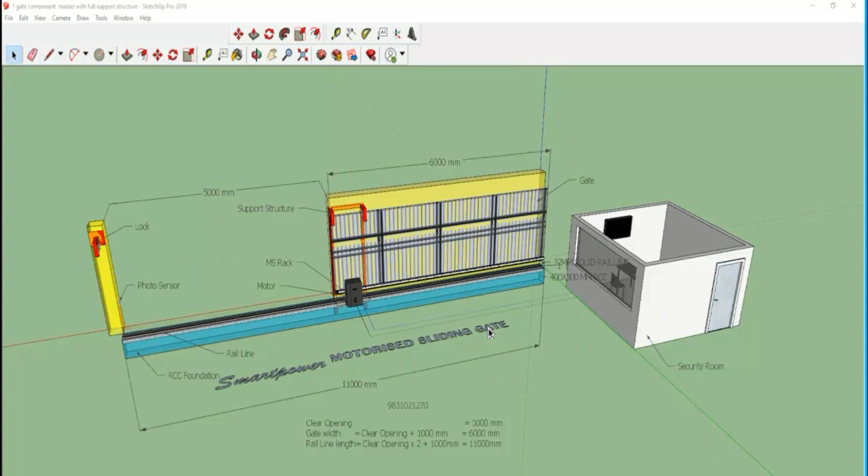This is the demonstration of Smartpower motorized sliding gate. You can see the clear opening is 5 meter, but the gate width is 6 meter. So gate size should be 1 meter more than the clear opening.

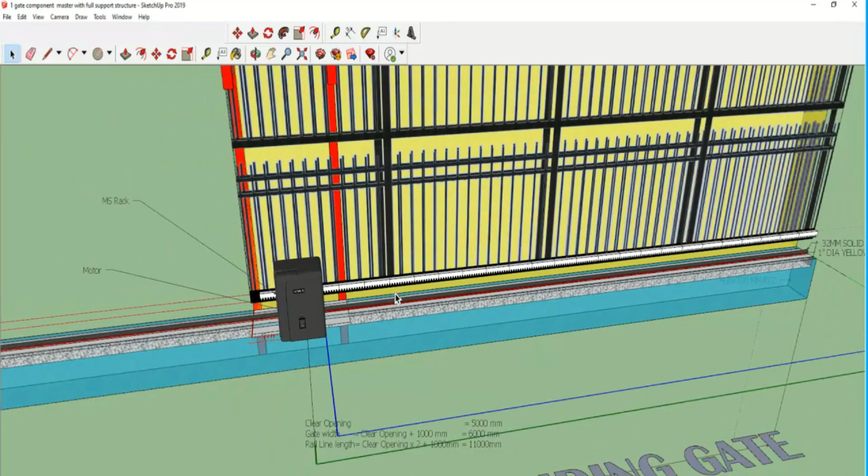I will show you the part by part also. This is the motor. This is the MS rack. This is the rack and pinion arrangement. When the motor pinion revolves, the gate rack will move and the gate will be moving.

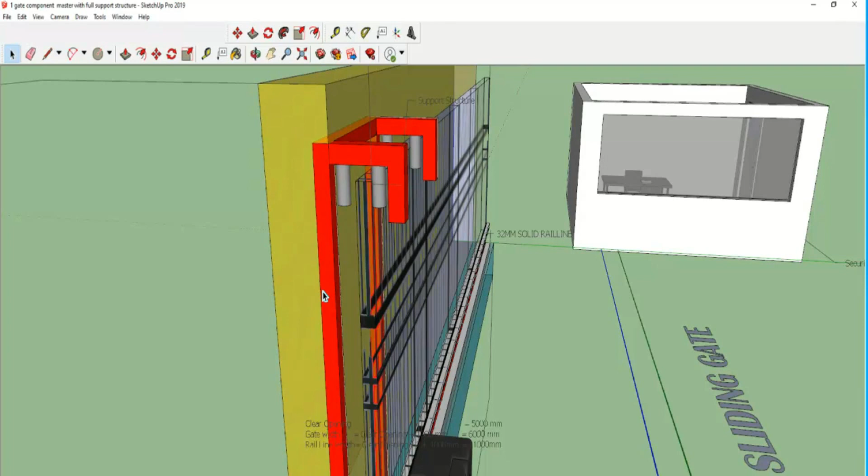This red color is the support structure. You can see the support structure is embedded inside the wall. If it is a brick wall, it can be embedded inside. If it is an RCC wall, then you can keep it inside or you can keep it outside also.

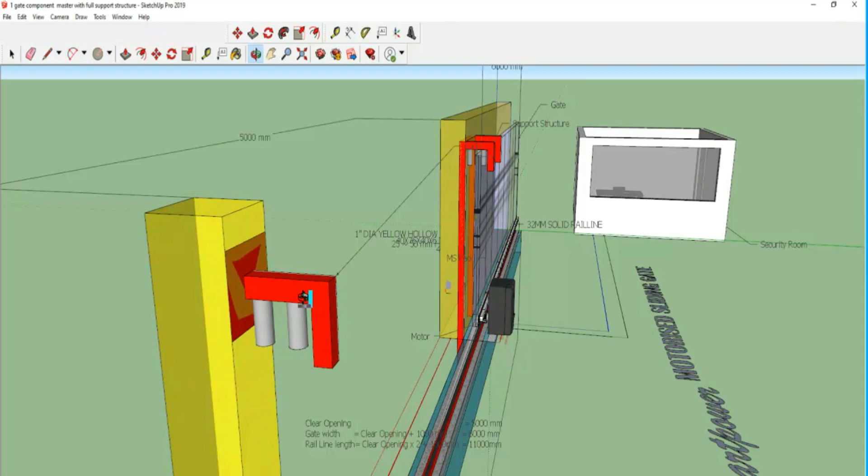And these are the rollers, support rollers. On the other side you can see this is the locking arrangement with the support wheels.

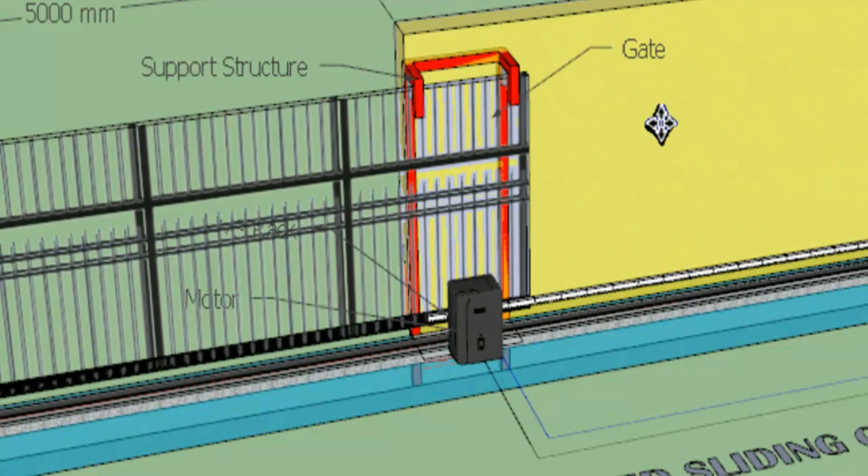I will show you the gate movement and each and every part separately. You can see this is the 5 meter gate, 6 meter gate. This can travel 5 meter and can come back.

This one is the motor. For a clear understanding, we can remove the motor and show you. This is the motor and this is the MS rack.

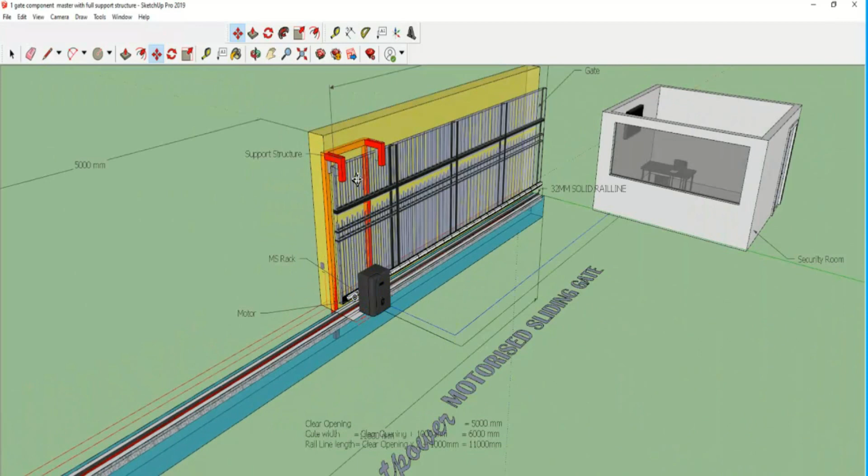This red one is the support structure. If you see from the back side, this support structure is embedded inside the ground, 2 to 3 feet inside the ground in the RCC foundation.

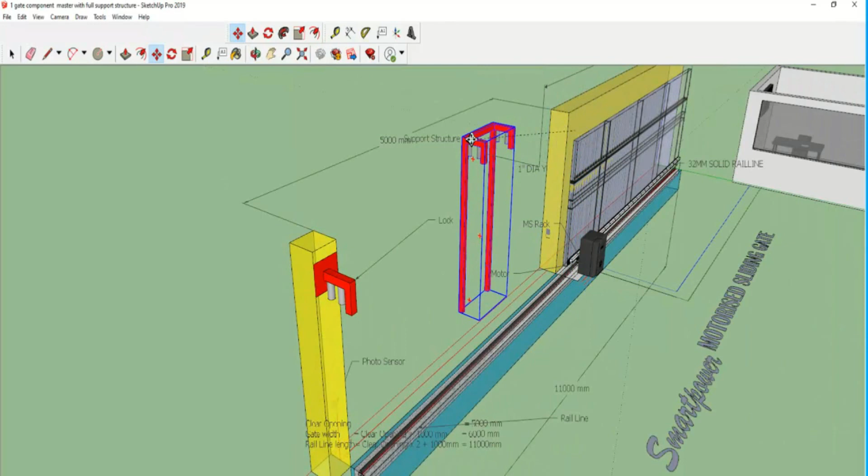You can remove the support structure and see a clear view. In some places we don't have this yellow wall at the back, so you can remove the yellow wall and

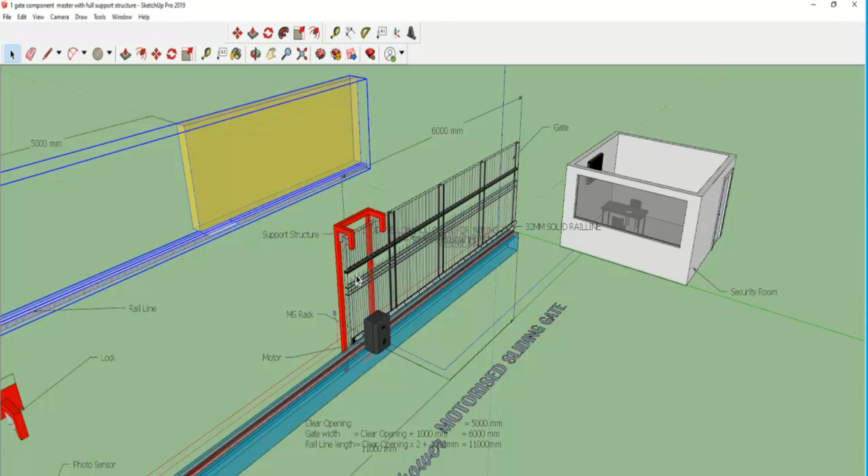only this support structure is enough to hold the gate. In that case, if the wall is not present and the gate is very heavy, then this arm will be extended to the bottom and will go down to the bottom level and into the RCC foundation for support.

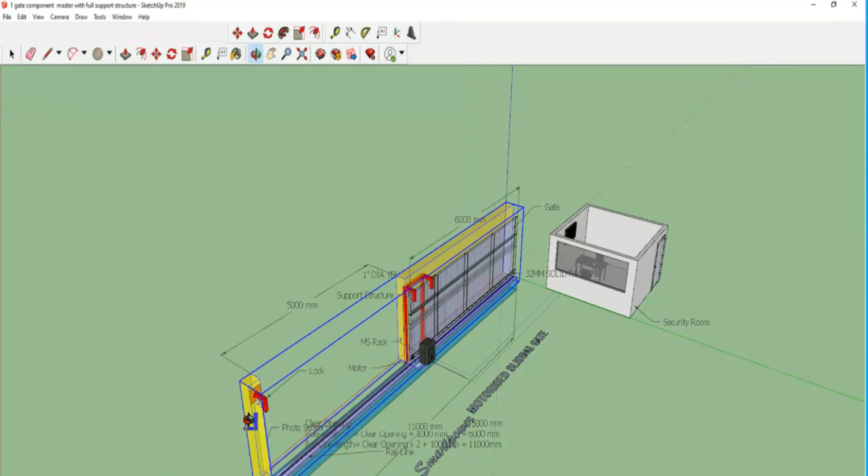Now this is the lock plate and these are the supporting wheels of the lock plate. You can remove the lock plate like this and see this is the lock plate, locking arrangement.

This is the total 11 meter rail line for a 5 meter clear opening. This 11 meter RCC foundation will also need to be done.

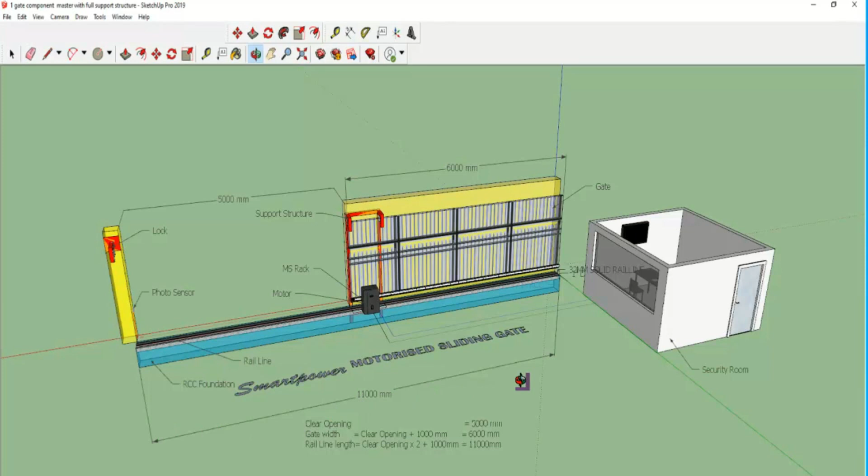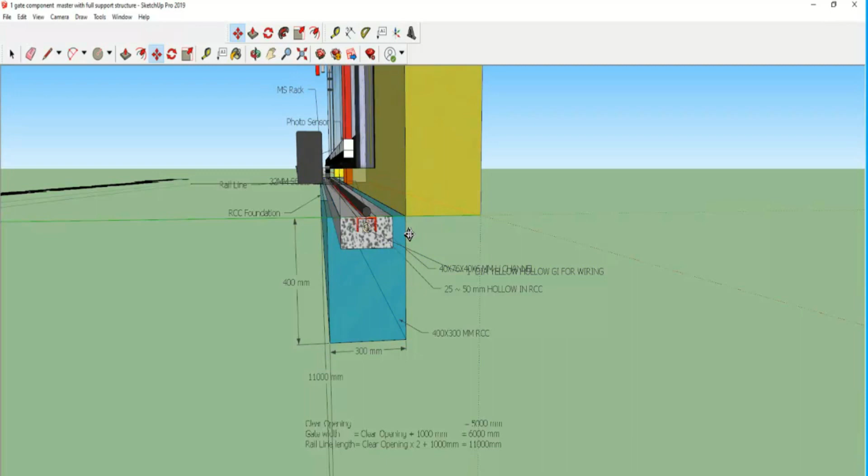I will show you the cross section of the RCC foundation. You can see this is the cross section. This is 300 mm away, this is the boundary wall yellow color, so it is touching the boundary wall and 300 mm width. Height can be 400 mm or between 300 to 500 mm depending upon the soil condition.

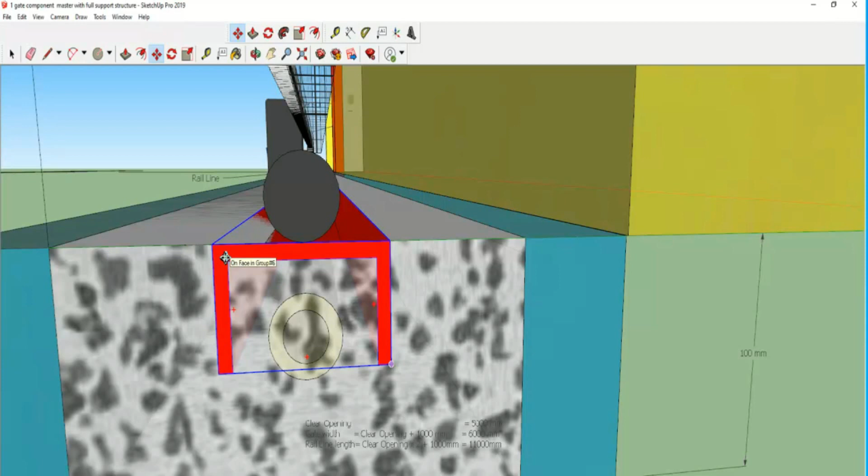This is the total RCC foundation. The red one I can show you is the U channel, 40 mm height, 76 width and 40 down, with 6 mm thickness. This is the U channel which is embedded inside the RCC foundation.

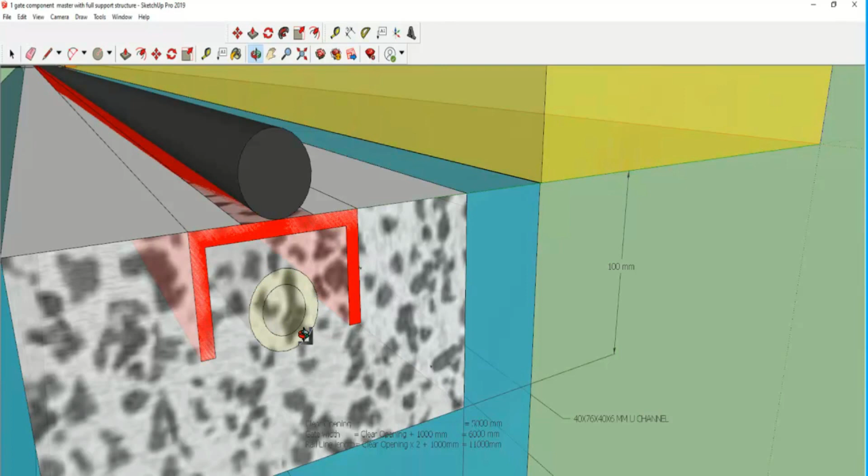On the U channel you can see a 32 mm round rod which is the rail line. This rail line can be 22 mm or 32 mm depending upon the gate size and the wheel type. Below the U channel there is a rubber pipe or galvanized pipe for passing the wire for

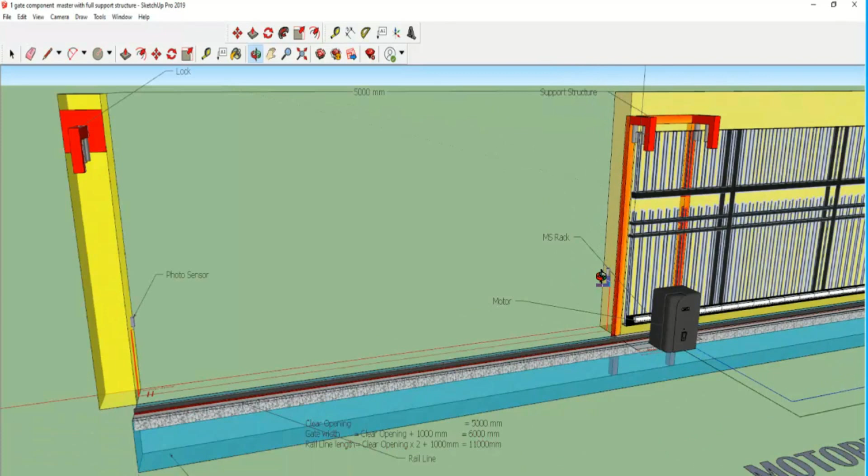the photo sensor. These are photo sensor. You can see this is photo sensor, this is the receiver, and on the right hand side I can show you the photo sensor, this is the transmitter. The photo sensor's job is to stop the gate when the gate is closing down.

If somebody comes between, if a car or a person comes in between, it will stop the gate. That is the purpose of the photo sensor. For the photo sensor, we need wiring between this rail line from this pillar to this pillar. In addition, I will show you the electrical wiring.

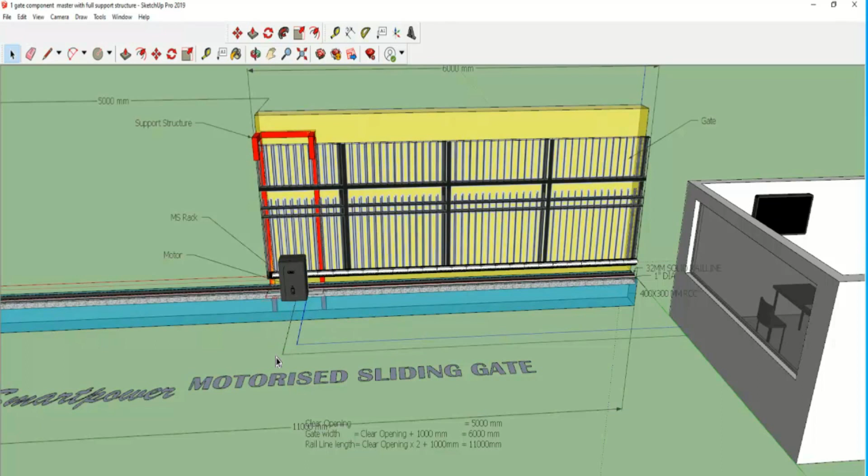You can see there the two wires are coming. One is coming from the control room to the motor. This is 230 volt 5 ampere socket line coming to the motor from the control room. Another is going from the motor away to the control room for the push button operation.

The people sitting inside this control room can operate the gate with a remote control also from a distance of 20 meter, or from a push button operation also. Push button operation can be any distance, 1 kilometer also. Push button from the security room, control room is not a problem.

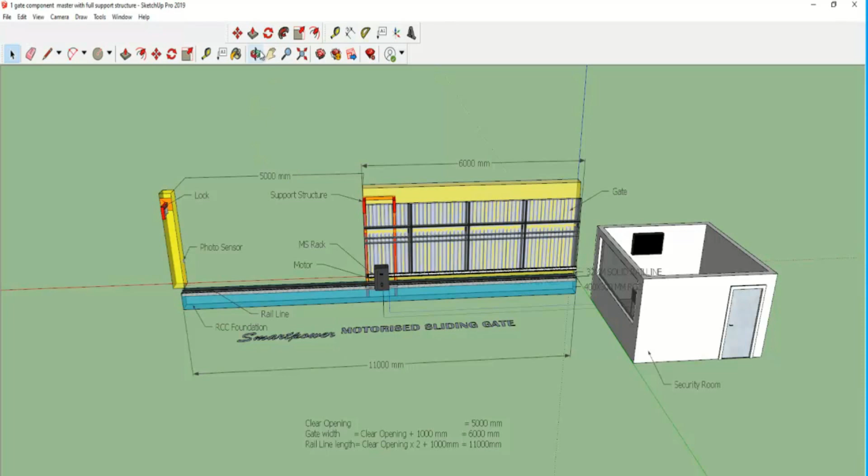So this is all about the Smartpower motorized sliding gate SketchUp drawing explanation.